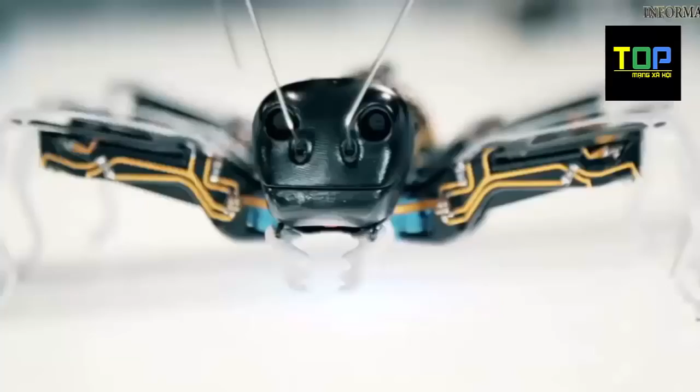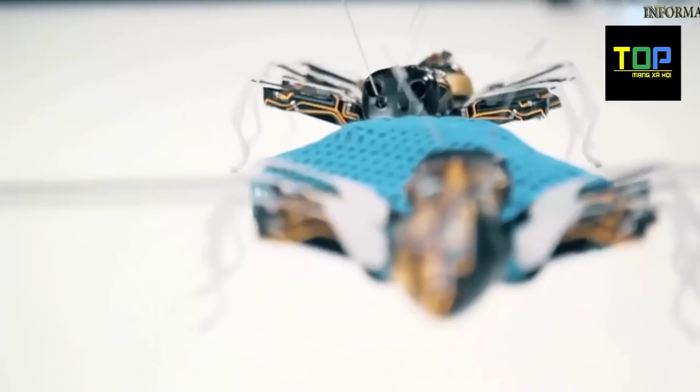For the first time with the bionic ants, the behavior of ants is imitated using complex control algorithms. In this respect, it's not about a technical game for the Festo engineers, but about nothing less than the production technology of the future. In the world of Industry 4.0, machines also have to communicate with each other, make autonomous decisions and cooperate in order to be able to react flexibly to different production scenarios.

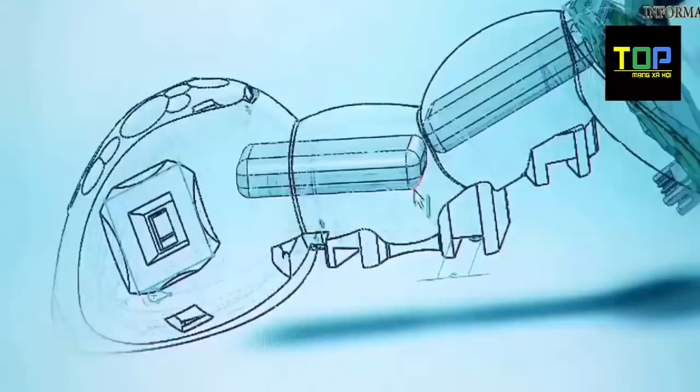The biggest challenge for the Festo engineers was to integrate all the necessary functions of an artificial ant into the smallest of spaces with as few components as possible. Our engineers overcame this challenge. Enough space was created for the rechargeable battery and room for the eyes was made in the ant's head.

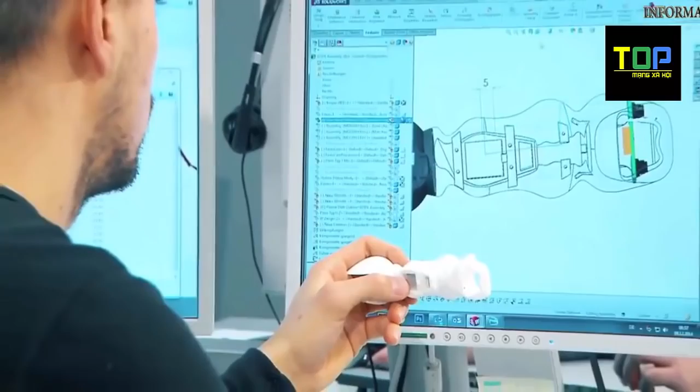Such a functionally integrated design is made possible thanks to 3D printing. It would be difficult to make such an ant using conventional production engineering.

3 piezo bending transducers are used on each leg. Coated on both sides with piezo ceramics, they are able, depending on the electrical controls, to deflect by 1.5 millimeters in both directions. Clearly not enough to get an ant to walk. With the help of an elastic hinge, the Festo technicians have managed to increase the ant's step length to over 10 millimeters.

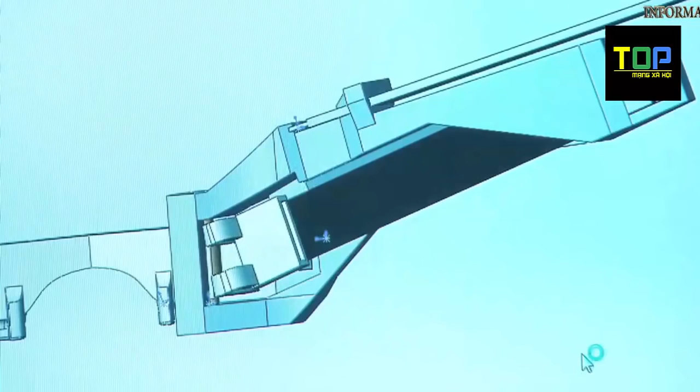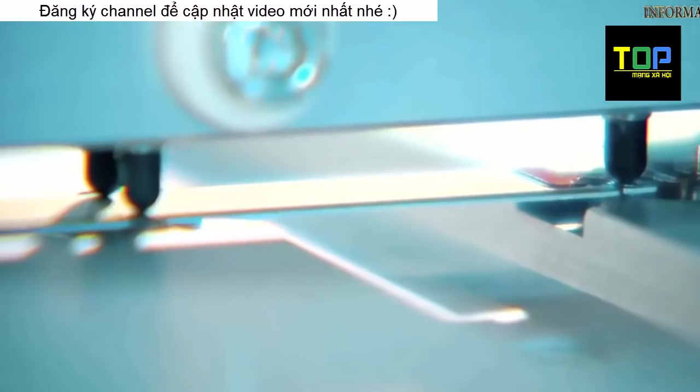The benefits of piezo elements are impressive. They work on little energy, are almost wear resistant and can be controlled quickly.

But how does a small ant robot learn to walk? The motion sequences of the ant are programmed and tested on a computer. If the ant walks smoothly on the computer, it must demonstrate during initial tests on the real model how well it can walk with its 6 legs. Taking into account that this bionic ant has only just learned to walk, it gets around really quickly.

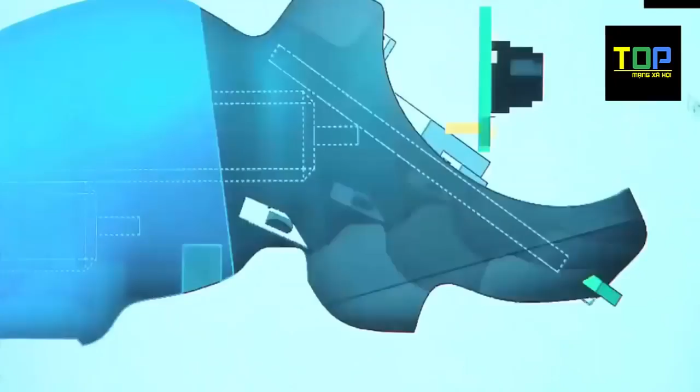Using a 3D camera system which was developed by scientists at Delft University and adapted to the ant by Festo engineers, the ant is able to see. Combined with an optoelectrical sensor, the bionic ant manages to find its way round in the space.

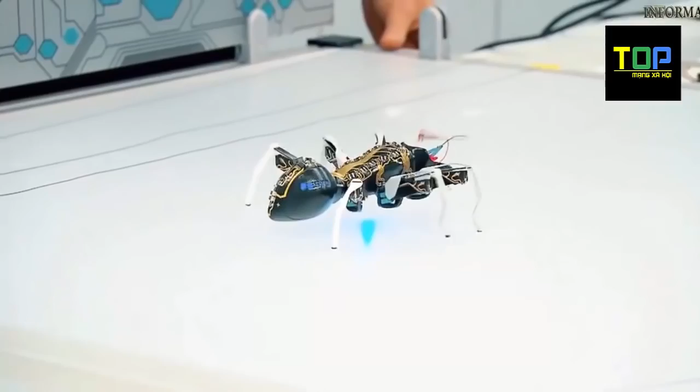How does the ant determine its position when it's on the pitch? Well, for this we actually use 3 sensors. First of all, we have a mouse sensor here under its abdomen. The mouse sensor is actually the same as in a computer mouse. We can use this to track where the ant walks across the pitch.

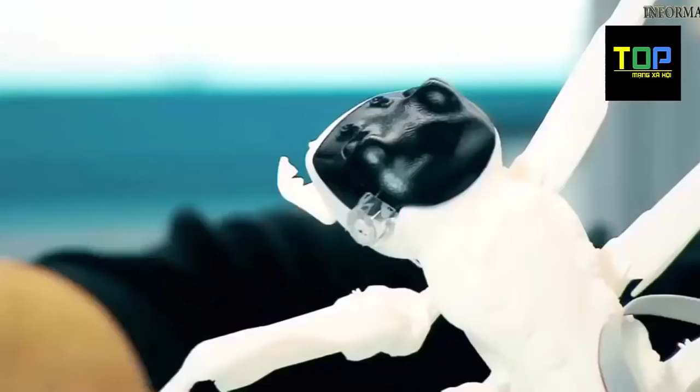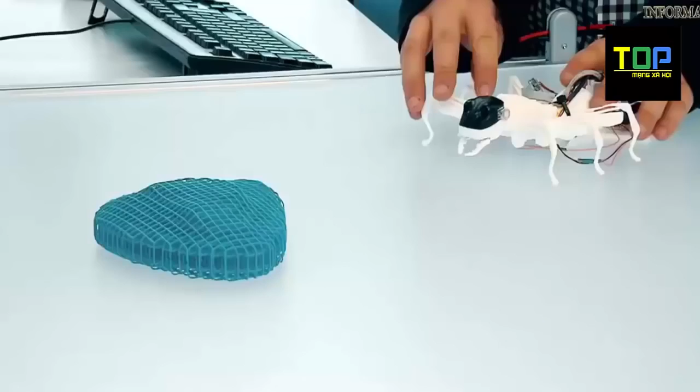We also have a magnetometer here in its head. The compass actually shows where north is, and with this we can determine what direction the ant is headed. Here at the front we also have a camera system consisting of 2 cameras, which gives us a stereo image and means we can detect the markers on the pitch and also measure the distance to them. We can therefore position ourselves with complete accuracy on the pitch.

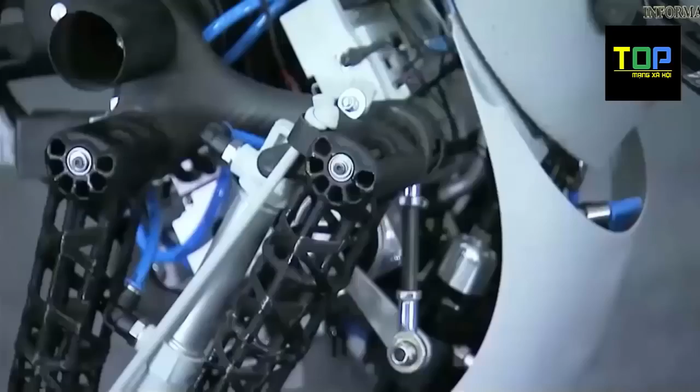Number 3. This is Matt and I'm Jay. We are the developers for the next generation in microflying robots called the Dragonfly.

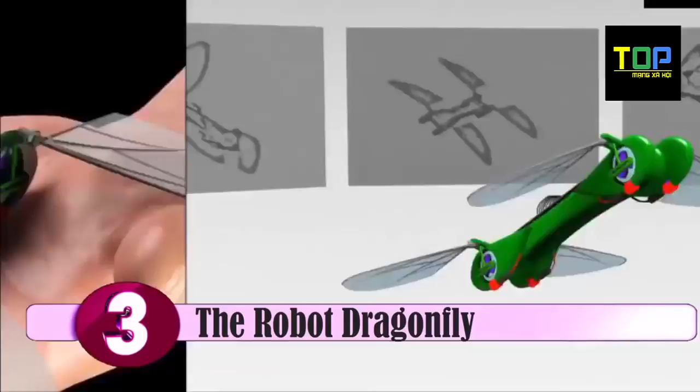For hundreds of years, man has looked to the sky to fly like the birds. Our inspiration comes from one insect in particular, the dragonfly, with unmatched flight performance in the insect world.

The TechJect dragonfly is a lightweight robotic insect that collects and relays information while flying like a bird or hovering like an insect. Weighing in at less than 1 ounce, approximately the weight of a AA battery, the Dragonfly is the latest in ultra-micro avionics with stereoscopic vision, flight control systems, and a camera-ready operating system.

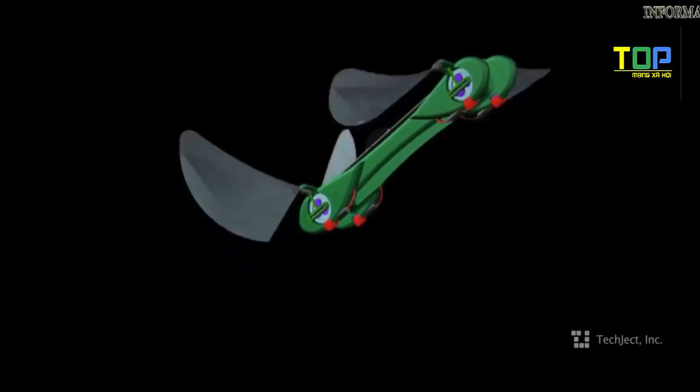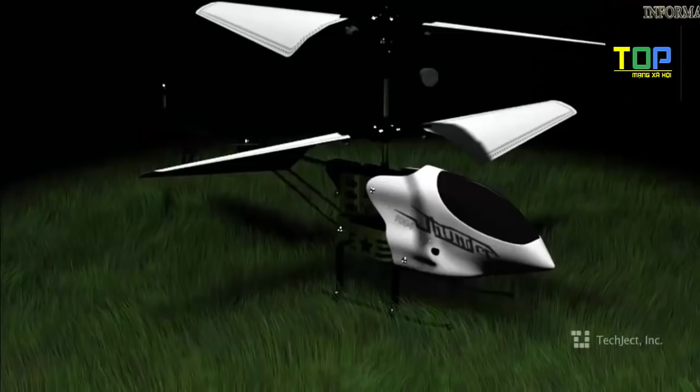This means you can do amazing aerial photography, spy on people, secure your house, or use it as the next-gen gaming platform. We've all seen helicopters, we've all seen quadrotors and airplanes, but really, all of them are bulky, low on battery, and really just a one-trick pony.

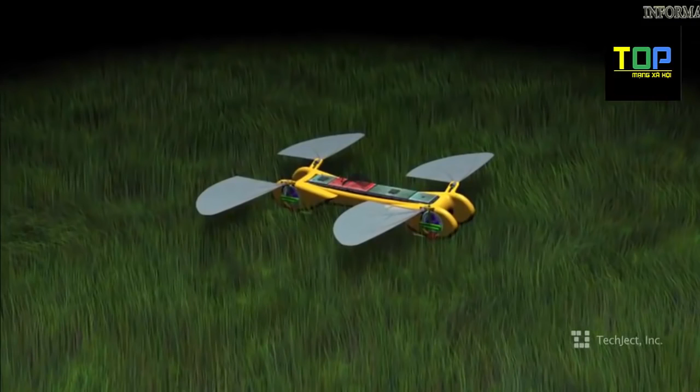The TechJect Dragonfly is really in a league of its own. It hovers like the best quadrotors and helicopters. It flies like the best of airplanes. It's really all these different flyers combined. The Dragonfly gets smaller and smaller with each iteration while enhancing its performance, something physically impossible for all other flying systems. What you have is the world's first aerial photography tool that's efficient, user-friendly, and you can take it in your pocket wherever you go.

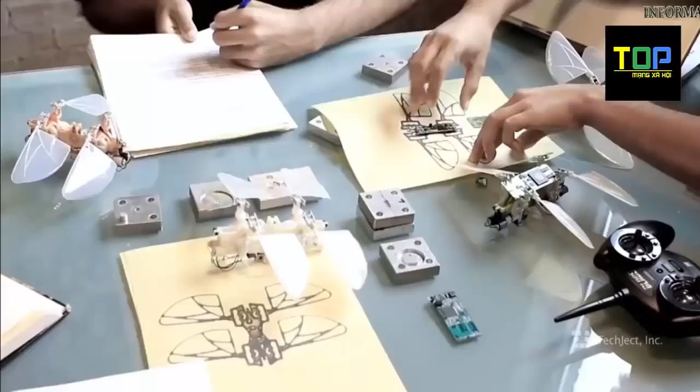I got my PhD in robotics and artificial intelligence from Georgia Tech, and I've been pursuing my passion for designing the next generation robots for the past 10 years, winning numerous competitions, patents, and awards in robotic systems. I'm a graduate student in mechanical engineering at Georgia Tech, with focus on mechatronics and automation.

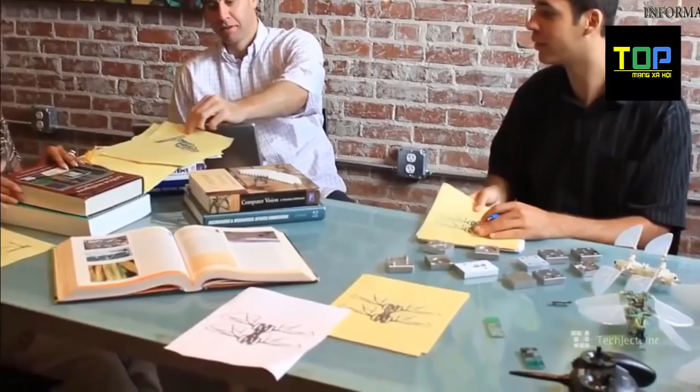The research behind the Dragonfly began with a $1 million grant from the U.S. Air Force. The Dragonfly has been developed at Georgia Tech as a joint effort between PhDs, graduate students, researchers, and professors from multiple universities across the world. The Dragonfly has 5 technology patents on its design, ranging from mechanics, aerodynamics, and flight controls. The Dragonfly is a game-changing technology and has won numerous awards, including Best Design at Georgia Tech Research and Innovation Competition and first place at the Robotics Innovation Competition in Massachusetts.

Unlike most other flying vehicles, the Dragonfly is highly modular. You can upgrade all the elements of the robotic insect through our website, from actuators to wings to electronics and many more.

You can make it faster and more dynamic for gaming, or higher endurance and more stable for aerial photography. We offer 3 different electronics packages, ranging from basic flight control using gyroscopes and accelerometers to more advanced packages, which include GPS, high-definition video, multiple cameras, and wireless communication. The packages are the lightest in the world, going from 3 up to 5 grams, weighing less than a quarter, and are smaller than a stick of gum.

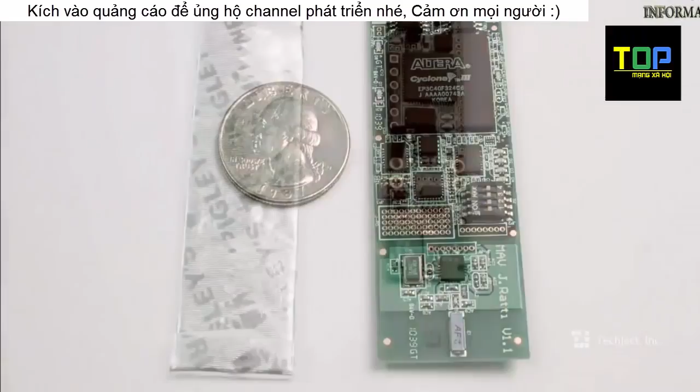The system is quite user-friendly and can even be flown with an iPad or smartphone. We offer an SDK to take your already awesome flying insect to the next level. With 20 environmental sensors, cameras, and GPS capabilities, it can be developed to track athletes, outdoor events, or integrated with an app as a fun way to record and retrace a day of skiing, hiking, or whatever you like.

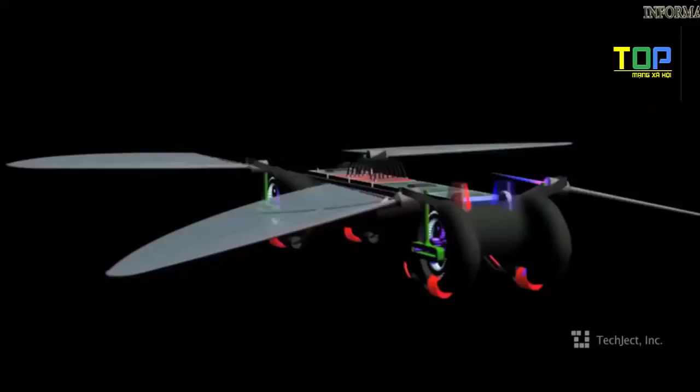As a home security option, the Dragonfly can hover, monitor, and report from inside or outside your home or property. The military can benefit from compact flyers, given that each soldier has a look ahead. Having the Dragonfly as a pocketable tool for the police can ensure rapid response to stop violence in time. This could be the next generation in spy tools. Even James Bond would want one of these in his pocket.

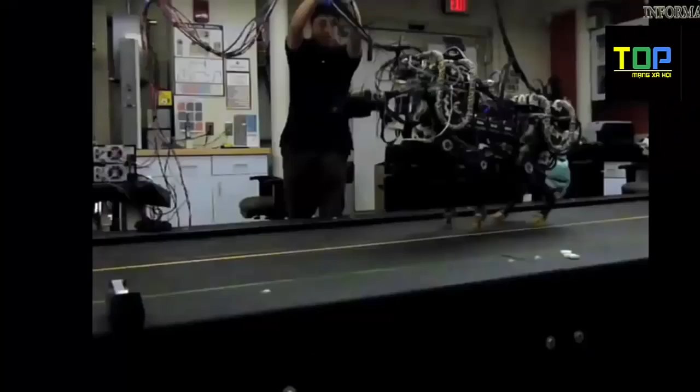For example, we can create prosthetic legs out of that technology, or you can even make a new form of transportation replacing cars, so that you don't need a road in our world.

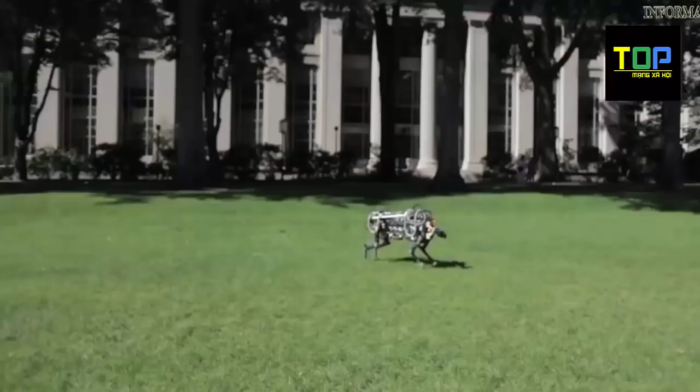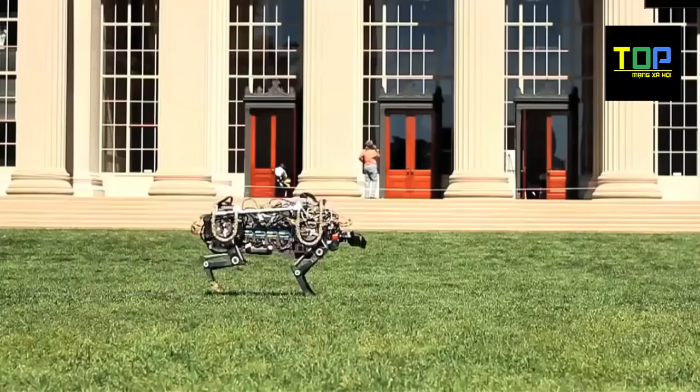Cheetah is the fastest four-legged animal in the world, and we would like to make our robot run fast like a cheetah. When we started to build our robot, we looked at the cheetah's motion and applied its principles to our mechanical version of Cheetah. Currently, our robot Cheetah can run up to 10 miles per hour and jump over a 33 centimeter high obstacle.

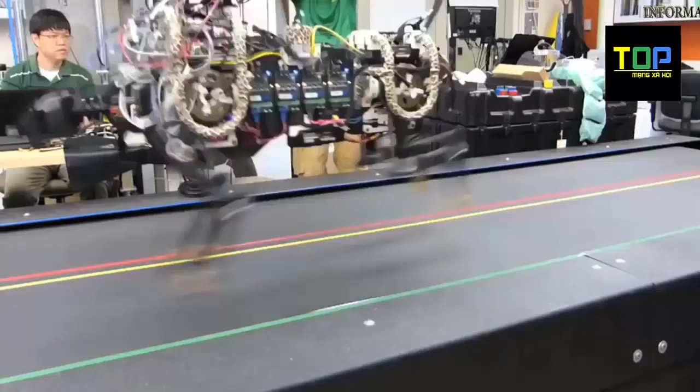Previously, most legged robots were powered by internal combustion engines and hydraulic transmission, which are very noisy and very inefficient. But people believed that internal combustion engines and hydraulics were the only way to make a legged robot run and support itself, that electric motors are not powerful enough. This is the first time we show that an electrically powered robot can run and jump over foot-height obstacles. In order...